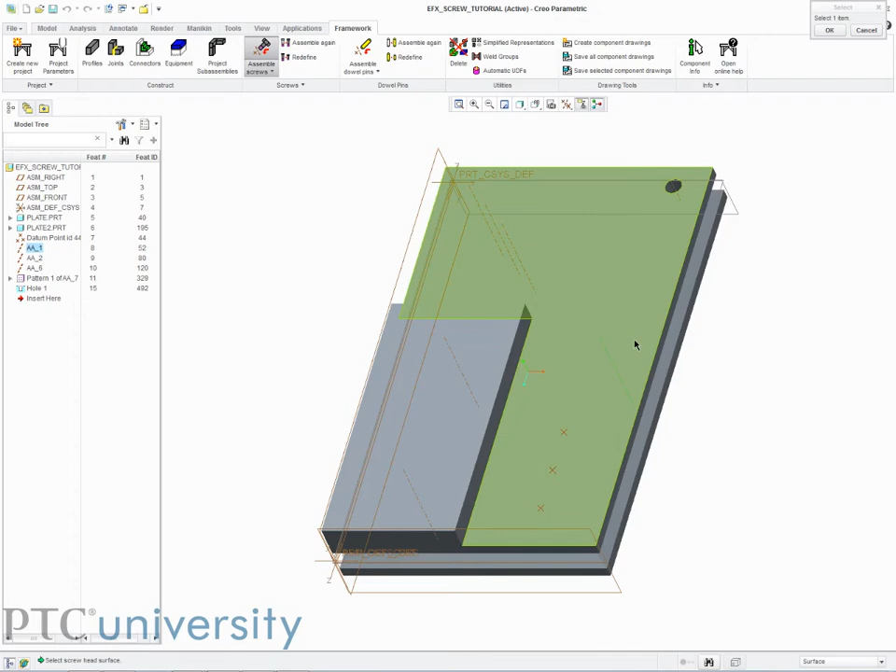Hello, my name is Perry Franklin, and today I'm going to explain how to use screws in Creo's Advanced Framework Extension, or AFX. AFX has two different methods for placing screws: assemble on point or axis, and assemble by mouse pick. I've already placed a few points and axes in the model, so I will select assemble on point or axis. I will first pick the axis or point, then pick the surface the screw head will rest on, and then pick the surface the nut will be on.

The Smart Library Screw dialog box appears. At the top is the option for standards, millimeters versus inches. Below that is the drop-down menu for screw type. To the right there are options for screw threading and size, as well as counterboring options. Underneath the screw type drop-down menu are the washer drop-down menus. I can select up to 2 washers to have on the screw head side. The next box down sets the hole size. I'll review the thread options later.

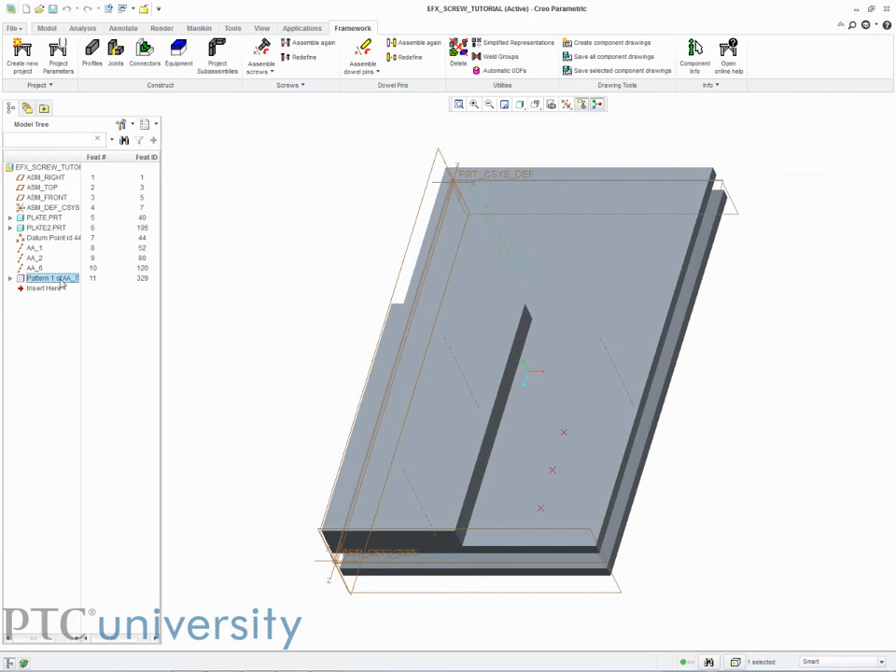Then there's the nut options. Up to 2 washers can be set on this side as well, and I can select a nut type from the drop-down menu. To the right are counterboring options for the nut. I'll explain the redefine assembled screw option later. The pattern screw connection will place screws on a pattern of axes or points if the point or axis selected is patterned. The assemble on all points or axes applies to when a point or axis feature has multiple points or axes within it.

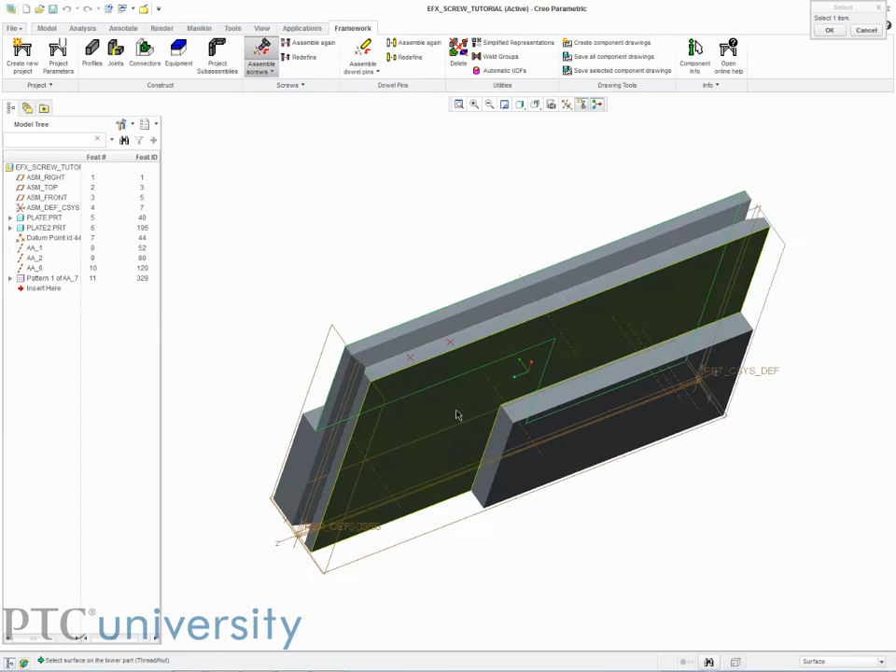The buttons below allow me to choose which assembly is active. Clicking the Reset Activated Assembly button chooses the top level assembly. Clicking Measure Diameter allows me to measure a diameter and automatically adjust the screw for the new diameter. Clicking Set Length Automatically finds the screw length that fits best. It will change the length of the screw depending on what lengths are available. Clicking Save Current Settings saves the screw connection settings, and clicking Open Saved Screw Connection opens the settings file.

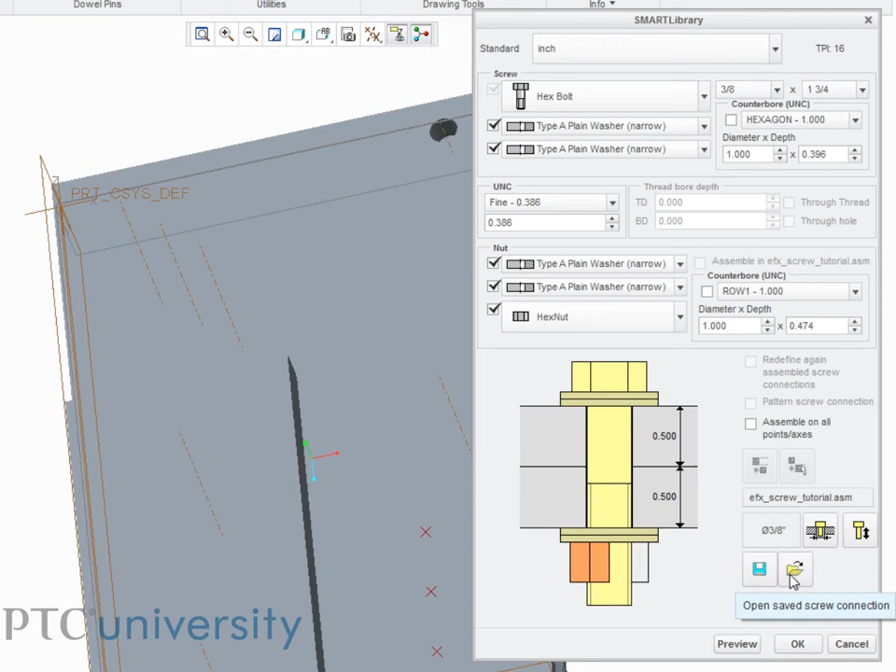When I create a screw on a point, it automatically creates an axis for the hole. The hole is created within the part.

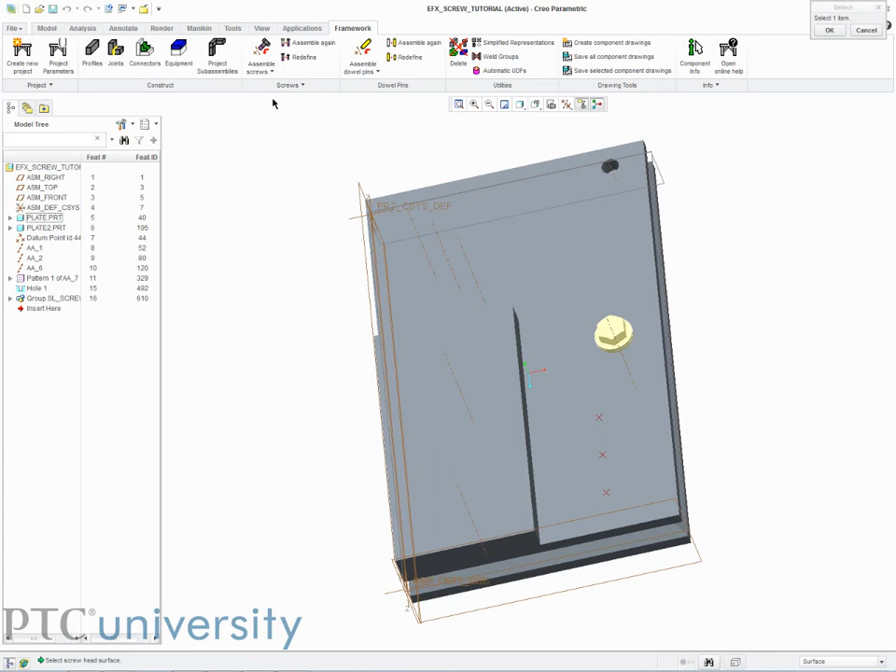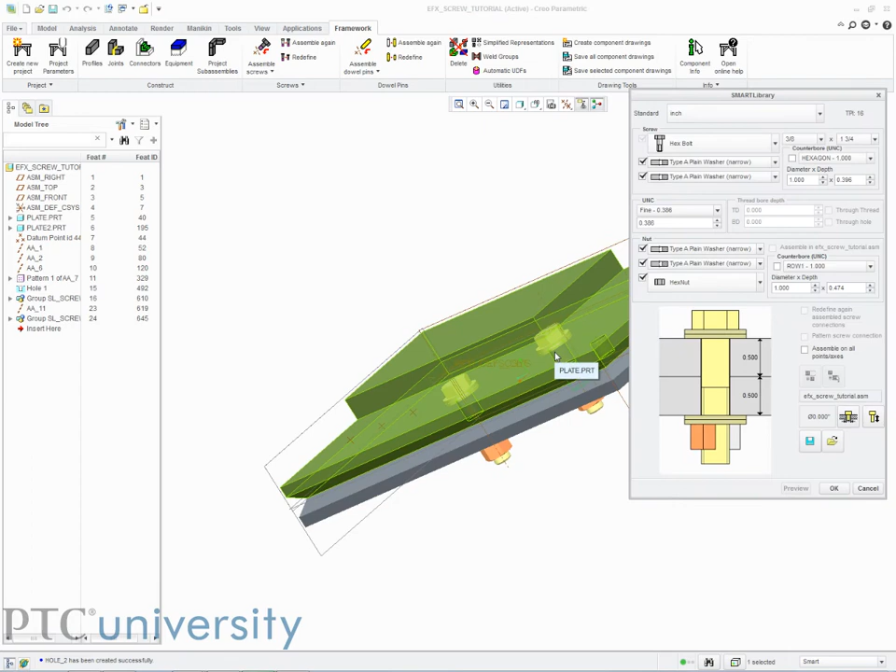If I assemble by mouse pick, I first need to pick the surface the head will rest on, then the surface that the nut will rest on, and then choose X and Y references. The X and Y reference can be planes, surfaces, or edges. All of the same options are available for the screw specifics. When I click OK, I can place the screw or screws by clicking where I want it. When I middle click, it brings the Smart Library dialog box up again. Right-clicking will end the assemble screw process. If I want to edit the placement of the hole, I can select the axis that is created when I place the screw.

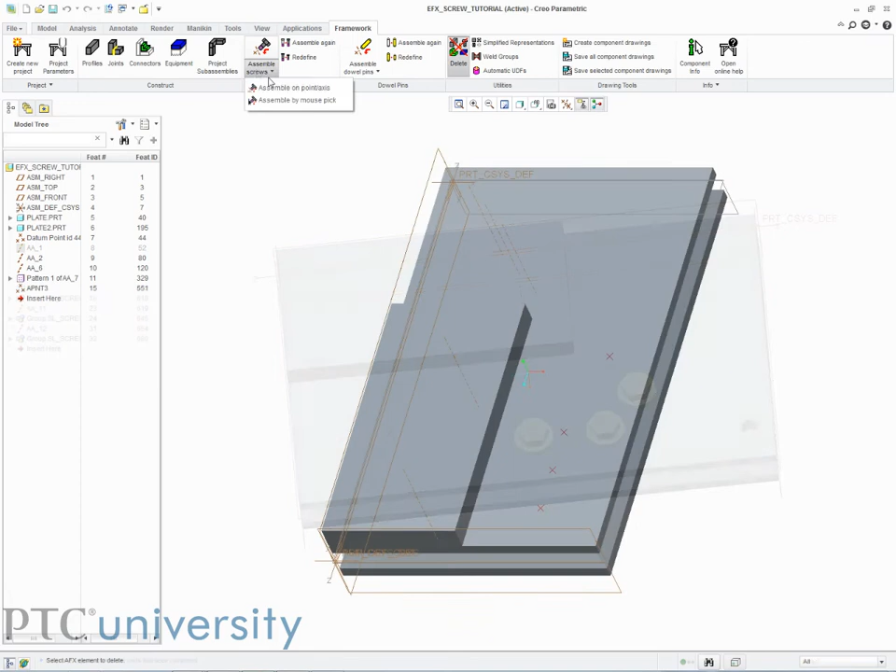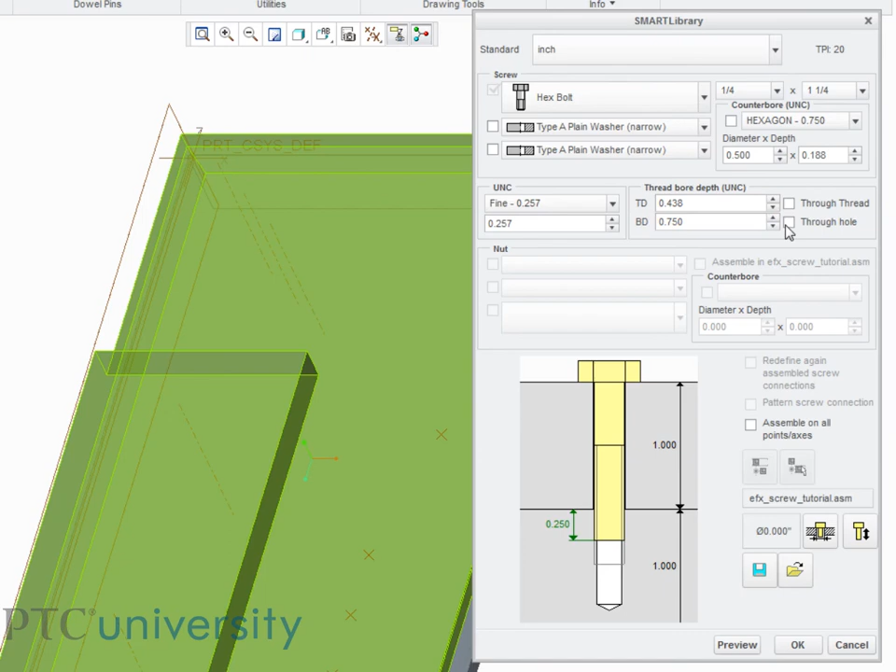If I want to place threaded holes, I can do that by selecting the surface the screw head will rest on and then the top surface of the piece that needs to be threaded. When the Smart Library dialog box appears, the image will no longer have a nut and all nut options are disabled. The thread bore depth options are enabled. TD is threading depth and BD is hole depth. I can choose to have a through hole or through hole and through threading.

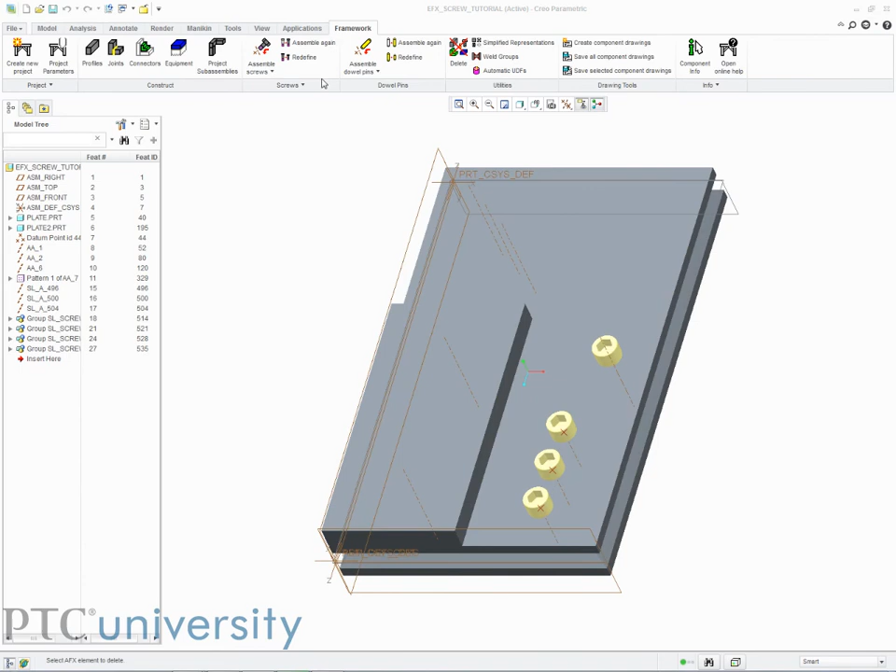The Assemble Again tool allows me to take a screw assembly I already defined and duplicate it elsewhere. Just select the screw assembly to be duplicated and its new point or axis. The Redefine tool lets me change the settings of an already assembled screw connection. The Redefine Again Assembled Screw Connections checkbox will allow me to modify any screw connections that were assembled from this screw connection or were assembled during the mouse pick loop command.

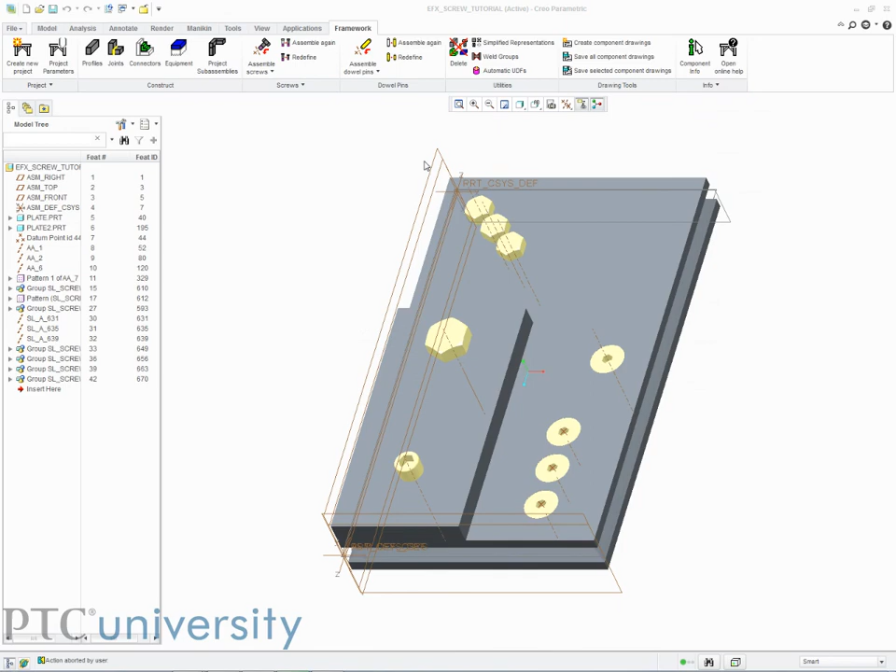I can also check screw connections using the Check Screw Connections tool. Double-click on a connection to fix any problems with the connection. To delete a screw connection, use the Delete tool located on the main AFX ribbon.